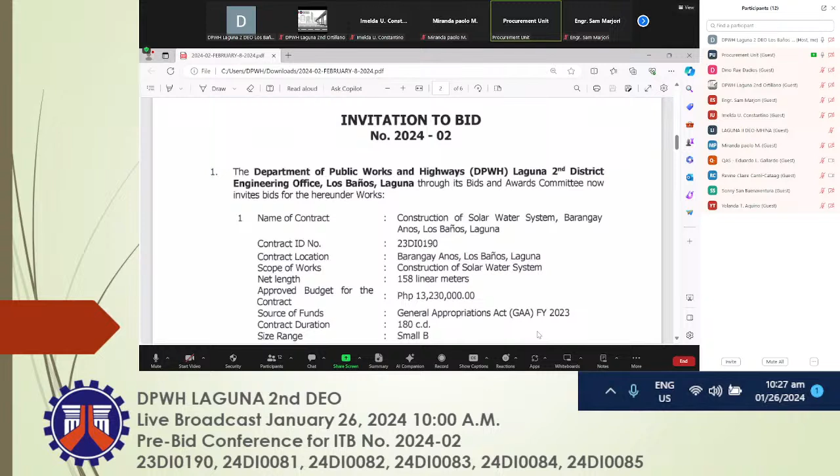First project: construction of solar water system, Barangay Anos, Los Baños, Laguna, with approved budget for the contract of 13,230,000 pesos. Second project, contract ID number 24DI0081: construction of road, Barangay Barandal, Calamba City, Laguna, with approved budget for the contract of 4,950,000 pesos.

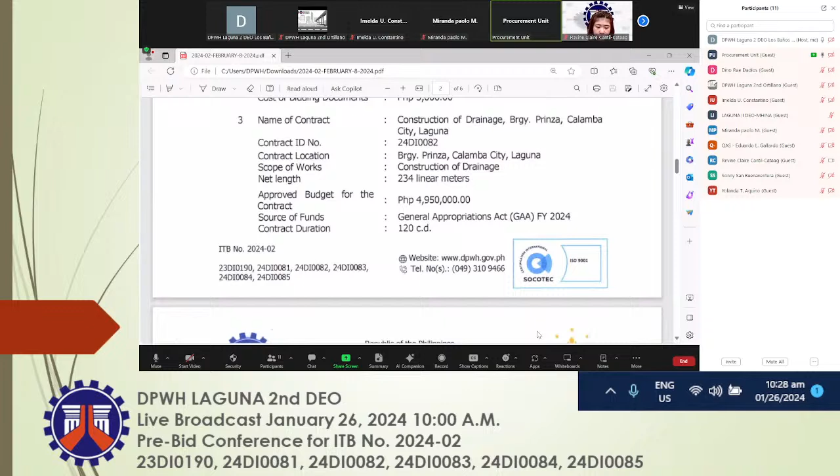Third project, contract ID number 24DI0082: construction in Barangay Prinza, Calamba City, Laguna, with approved budget for the contract of 4,950,000 pesos. Fourth project, contract ID number 24DI0083: rehabilitation of road and bridge, Barangay Dela Paz, Biñan, Laguna, with approved budget for the contract. Next project, contract ID number 24DI0084: construction of the revetment of Mayapa near Barandal-Mayapa Bridge, Barangay, with approved contract of 49...

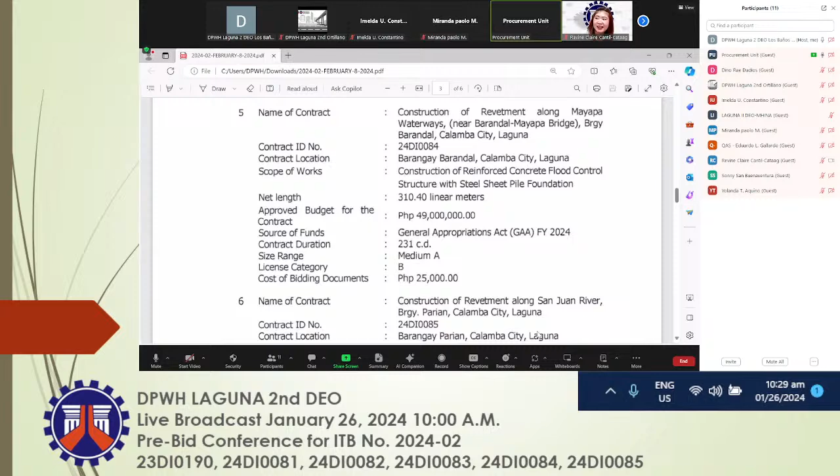And our last project is the procurement for the construction of revetment, with approved fund of 59,164,150 pesos.

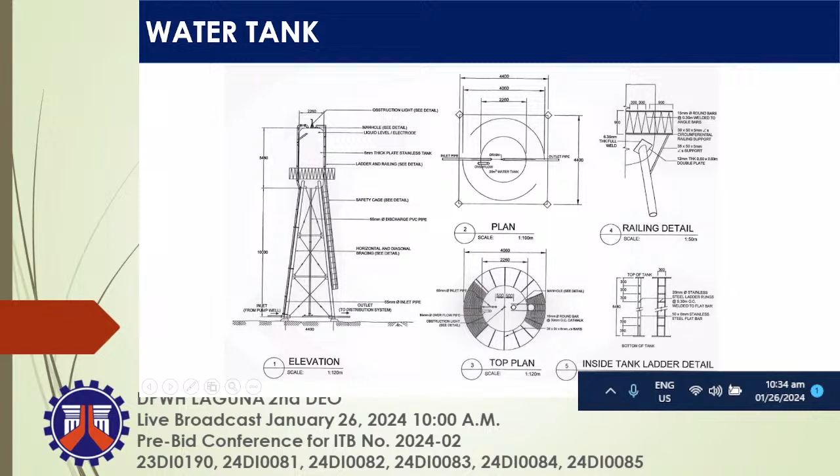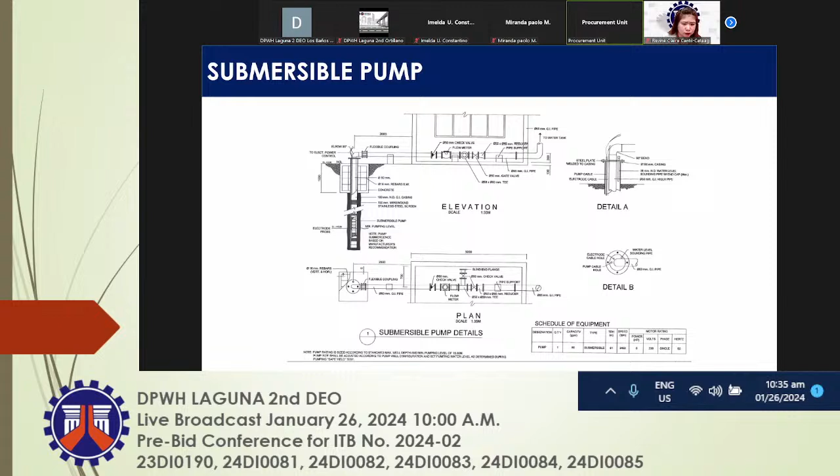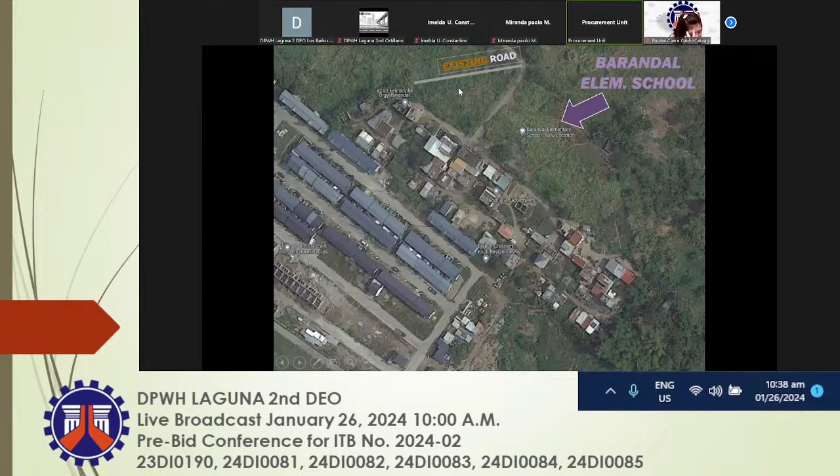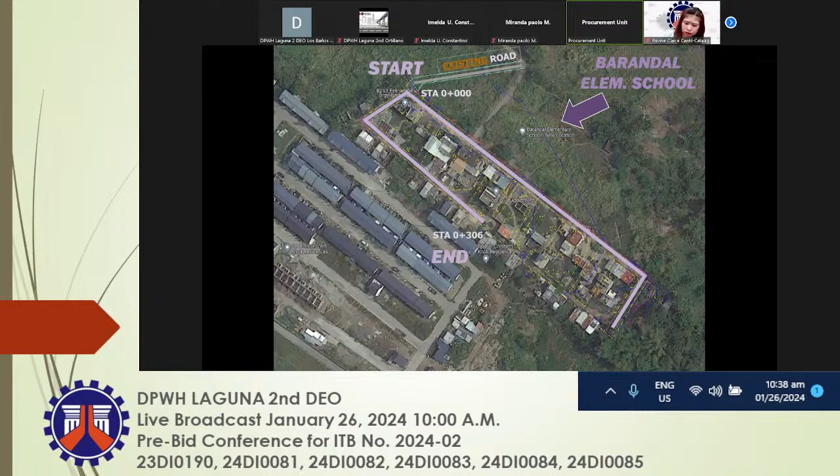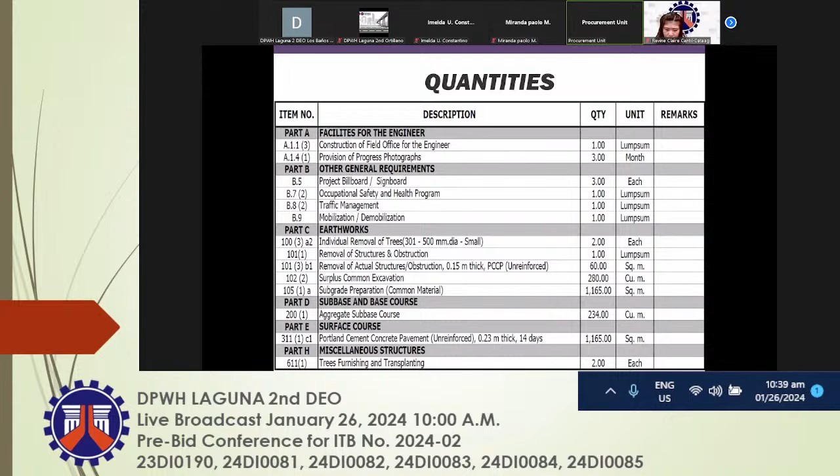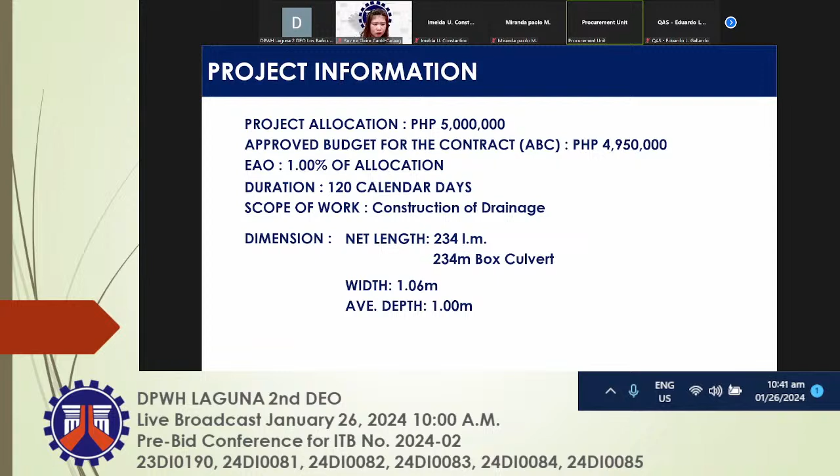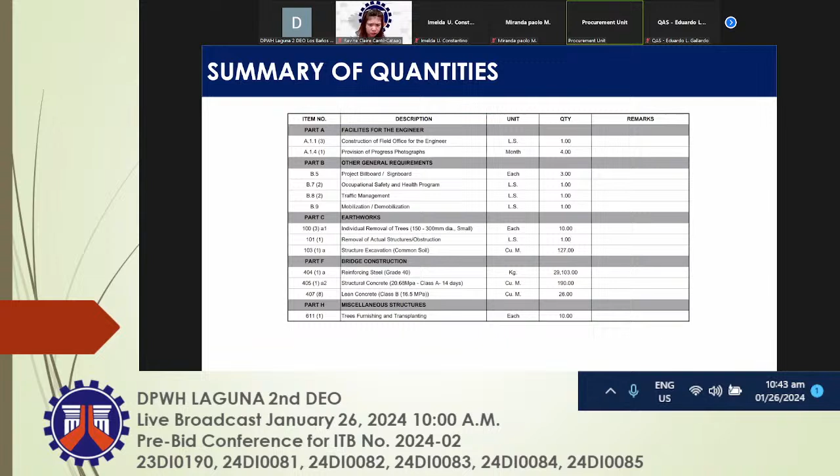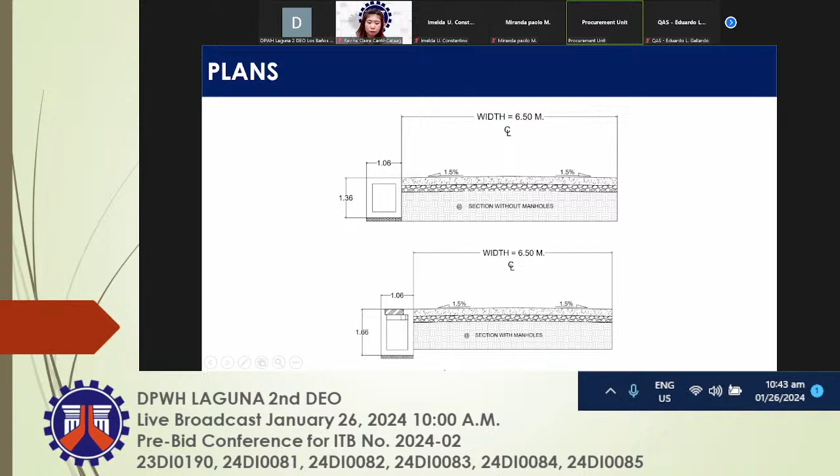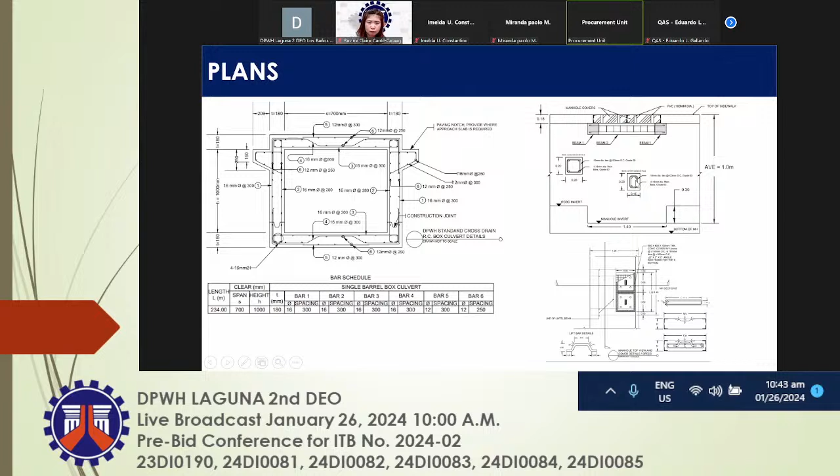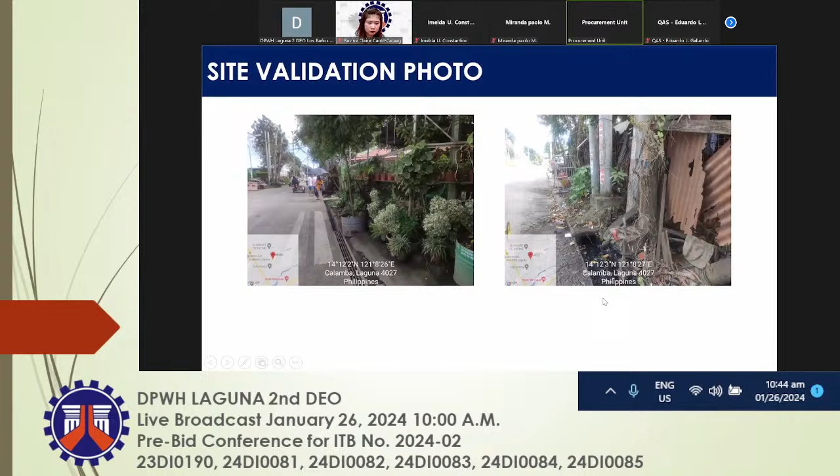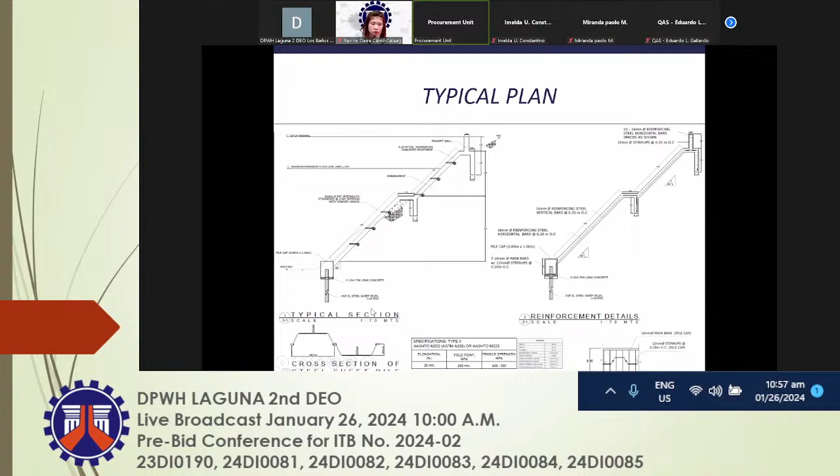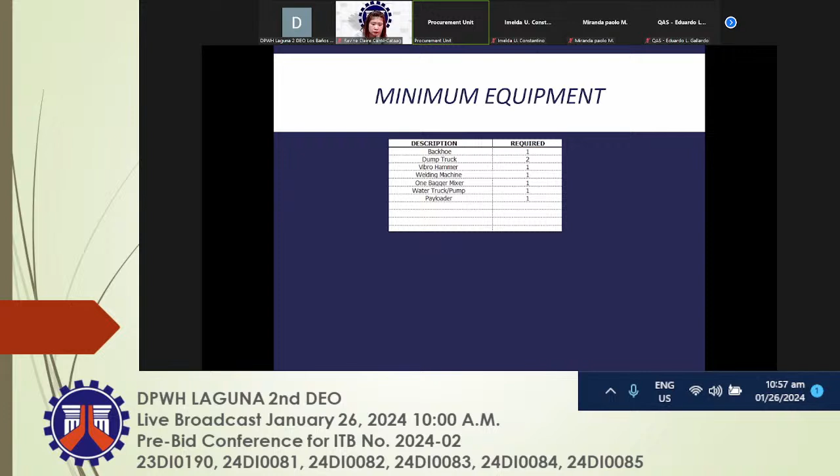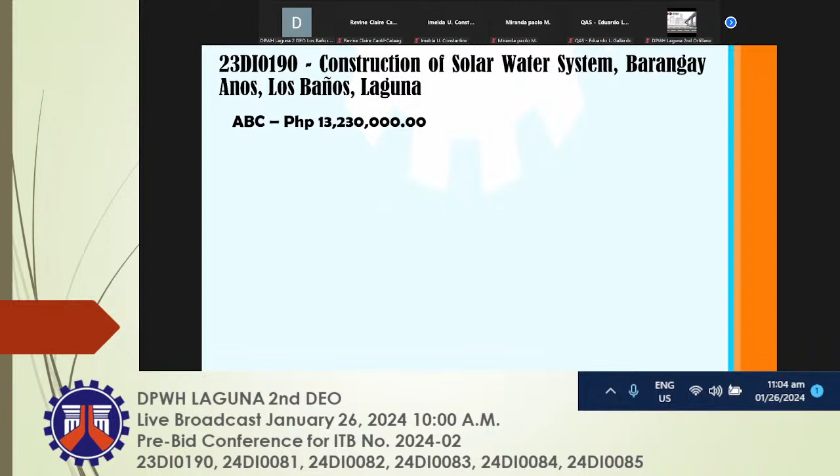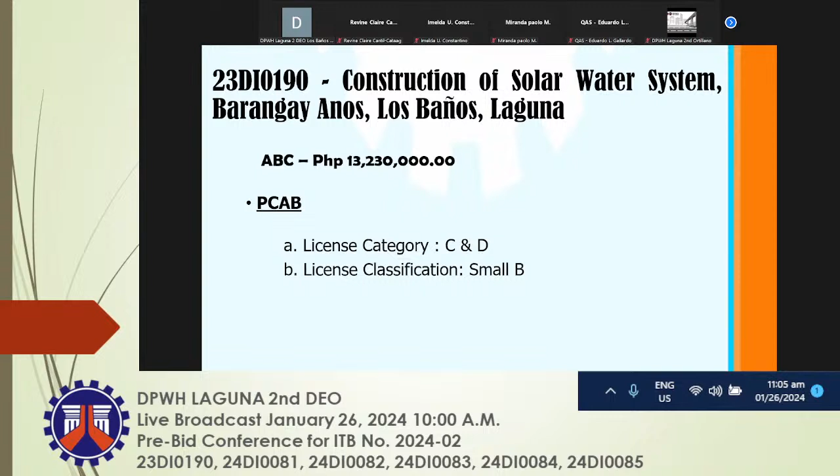23-0190, construction of solar water system, Barangay Anos, Los Baños, Laguna, with an ABC of 13,230,000. The major category of works is water supply, level 2 and 3. The following are the similar categories. For the PCAB license category, it should be category C and D, and classification small.

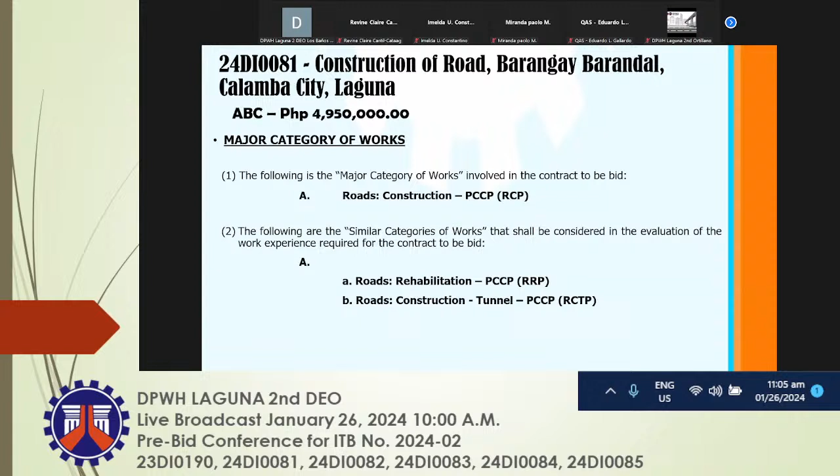Next project, 24-0081, construction of road, Barangay Barandal, Calamba City, Laguna, with an ABC of 4,950,000 pesos. The major category of works is road, and the following are the similar categories. For the PCAB license category, it should be category C and D, and classification small.

Next project, 24-0082, construction of drainage, Barangay Prinza, Calamba City, with an ABC of 4,950,000 pesos. The major category of work is flood control, and the following are the similar categories. For the PCAB license category, it should be category C and D, and classification of small.

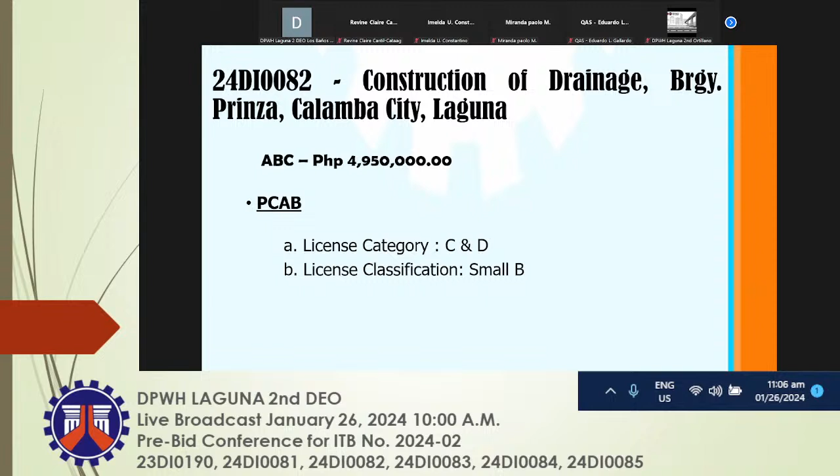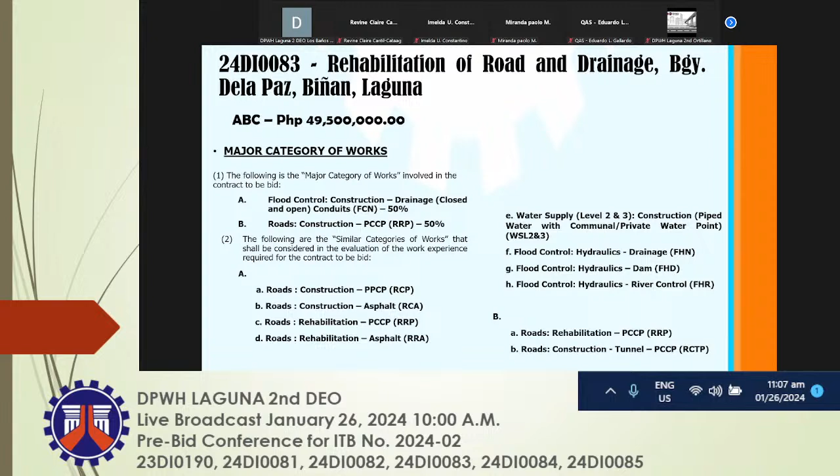Next project po, 24-0083, rehabilitation of road and drainage, Barangay Dela Paz, Biñan, with an ABC of 49,500,000 pesos. The major category of works are flood control and road, and the following are the similar categories. For the PCAB license category, it should be category B, and classification of medium.

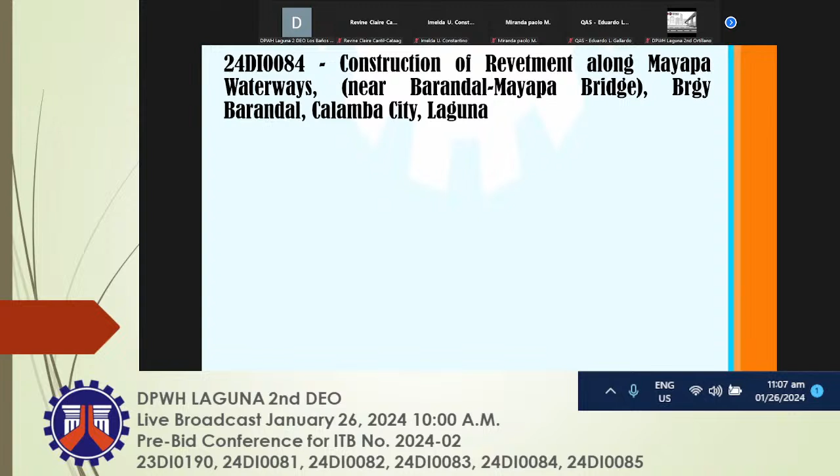Next project, 24DI0084, construction of Revetment along Mayapa Waterways near Barandal-Mayapa Bridge, Barangay Barandal, Calamba City, with an ABC of 49 million pesos. The major category of work is flood control, and the following are the similar categories. It should be category B, and classification of medium.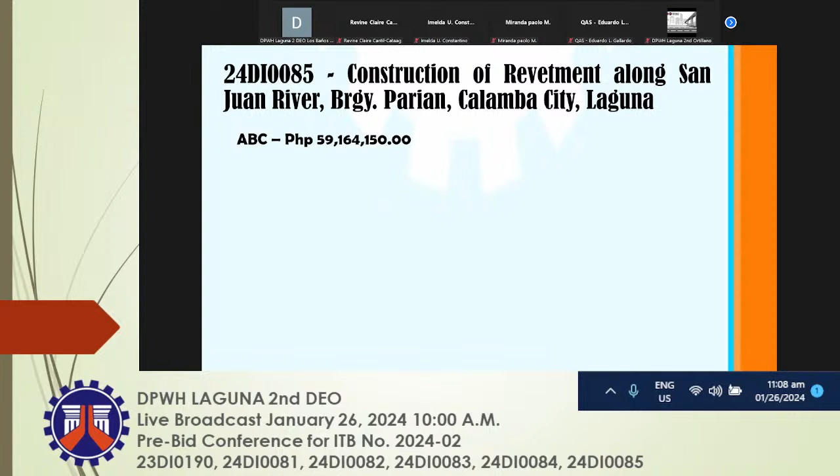For the last project, 24-0085, construction of Revetment along San Juan River, Barangay Parian, Calamba City, with an ABC of 59,164,150. The major category of work is flood control, and the following are the similar categories. For the PCAB license category, it should be category B, and classification of medium.

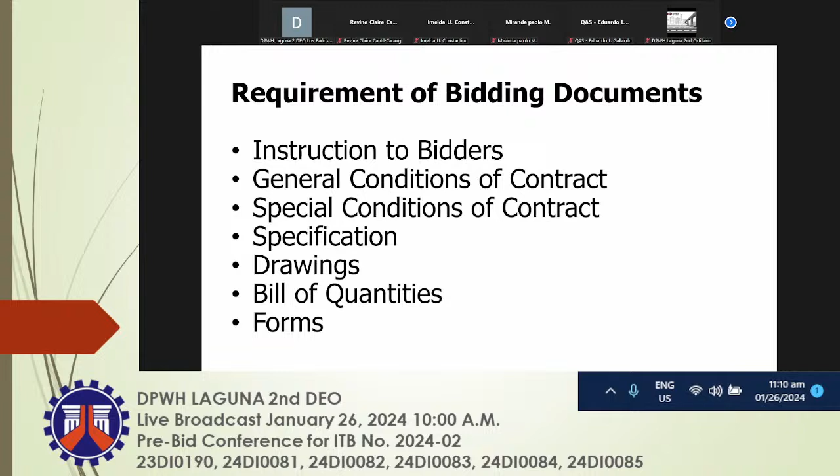Eligibility requirements for the technical component. For Class A documents, for legal documents: PhilGEPS registration certificate, valid PhilGEPS registration certificate, platinum membership in accordance with section 8.5. For technical documents: statement of prospective bidder, government and private contracts, including contracts awarded but not yet started if any, whether similar or not similar in nature and complexity to the contract to be bid. Statement of the bidder's single largest completed contract, similar to the contract to be bid, except under conditions provided under the rule.

Special PCAB license in case of joint ventures and registration for the type and cost of the contract to be bid. Original copy of bid security in the form of a bond. Submit also a certification issued by the Insurance Commission or original copy of notarized bid security declaration.

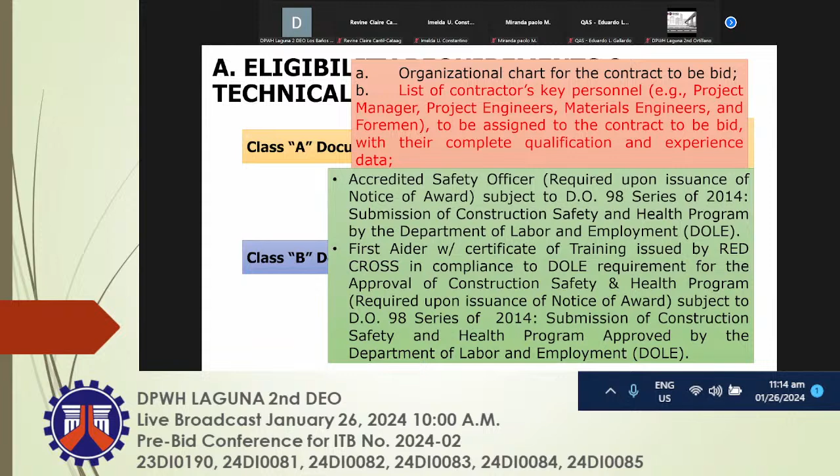Original duly signed omnibus sworn statement, and if applicable, original notarized secretary's certificate in case of a corporation, partnership, or cooperative, or original special power of attorney of all members of the joint venture, giving full power and authority to its officer to sign the OSS and do acts to represent the bidder.

The net financial contracting capacity (NFCC) of the bidder shall be used in the eligibility processing. Prospective bidder must have an NFCC at least equal to the ABC to be procured, as follows: NFCC equals the difference of current assets and current liabilities, multiplied by 15, and it will be subtracted by the value of portions of all outstanding works under the bidder's ongoing contracts, including awarded contracts to be started, which portions coincide with the contract to be bid. The fixed factor of 15 shall be used in the computation of NFCC regardless of the contract to be bid.

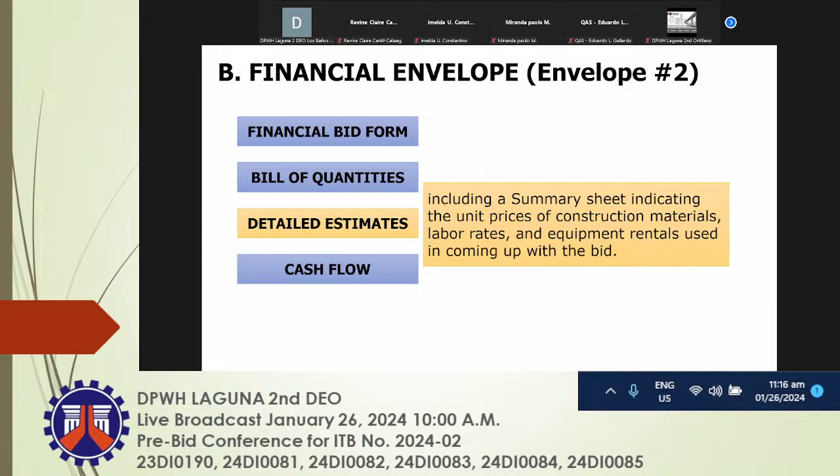For financial envelope, or envelope number 2: financial bid form must be in accordance with the form prescribed, bid prices in the bill of quantities, and detailed estimates including a summary sheet indicating the unit prices of construction materials, labor rates, and equipment rentals used in coming up with the bid.

Quarterly and monthly cash flow and payment statement, and instruction to bidders. Under ITB clause 20, from bid data sheet, the bidder shall submit 1 original and 2 copies of the first and second components of its bid, written in indelible ink and signed by the bidder or its duly authorized representative.

All envelopes shall: A, contain the name of the contract to be bid in capital letters. B, bear the name and address of the bidder in capital letters. C, be addressed to the procuring entity's BAC. D, bear [details], and E, bear a warning: do not open before the date and time for the opening.

The bidder shall enclose the original eligibility and technical documents in one sealed envelope, and the original of their financial component in another sealed envelope marked original financial component, sealing them all in an outer envelope marked original bid. Each copy of the first and second envelope shall be similarly sealed, duly marking the inner envelopes as copy number 1 or 2 technical component and copy number 1 or 2 financial component, and the outer envelope as copy number 1 or 2. Note: these envelopes containing the original and copies shall then be enclosed in one single envelope.

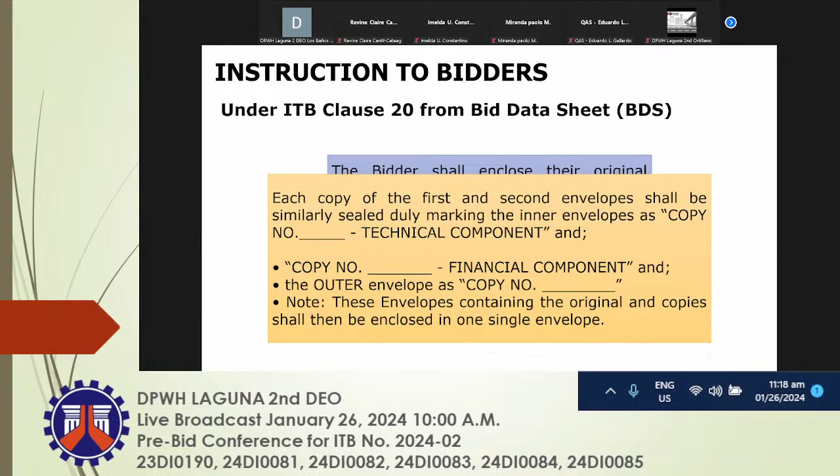Please refer to D.O. 11 series of 2017 for the inclusion of the minimum materials testing equipment in the technical component of the bid. For the minimum materials testing equipment, and D.O. 127 series of 2018, strict application of RA 9184 in the conduct of post-qualification of bidders with delayed ongoing contracts with the DPWH.

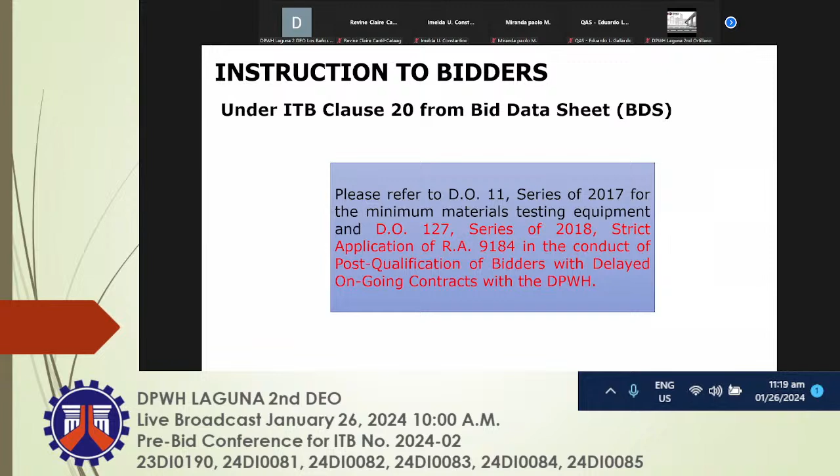For our next topic, about the electronic submission.

Electronic submission and receipt of bids. Legal references: Department Order Number 87, Series of 2020, on electronic submission and receipt of bids for the procurement of civil works contracts.

GPPB Resolution Number 09-2020, dated May 7, 2020, approving measures for the efficient conduct of procurement activities during a state of calamity or implementation of community quarantine or similar restrictions, authorizing the submission and receipt of bids through electronic means or email.

2016 Revised IRR of RA 9184. Electronic submission and receipt of bids procedures. Number 1.

Post the invitation to bid and bidding documents. Responsible person: BAC Secretariat. Must be posted in the DPWH and PhilGEPS websites and at any conspicuous place for 7 calendar days per Section 21 of the IRR of RA 9184.

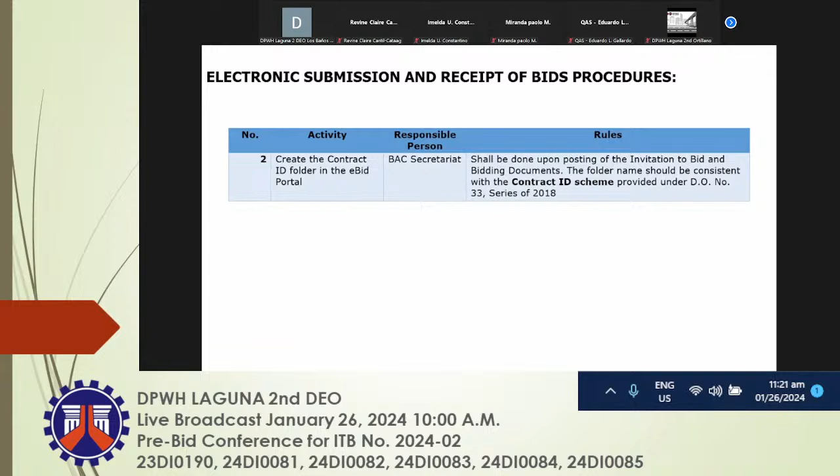Number 3. Purchase the bidding documents. Responsible person: contractor. Section 17.4 and Appendix 8, Guidelines on the Sale of Bidding Documents of the IRR of RA 9184.

Number 4. Send the proof of purchase of bidding documents. Responsible person: contractor.

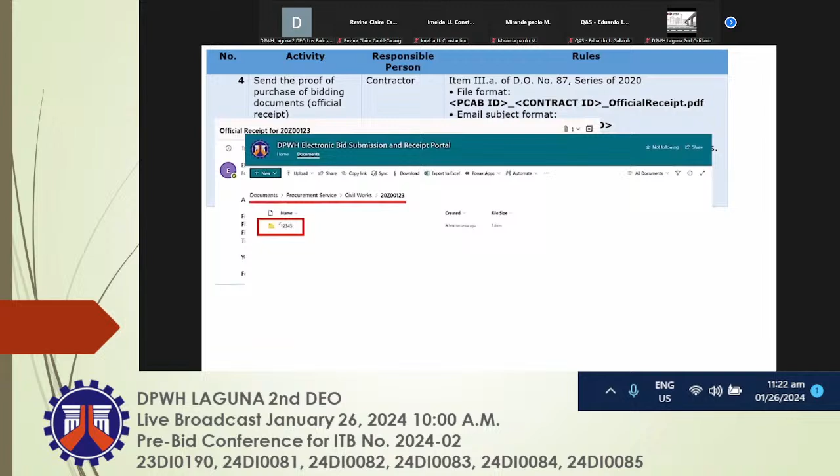Number 5. Send the electronic bid. Responsible person: contractor. File format: PCAB ID underscore contract ID underscore bid dot zip.

Email subject format: bid submission for contract ID. Must be in a password protected archive format, and shall contain 2 password protected archive files: the technical and financial proposal.

Number 6. Send the electronic bid due to attachment file size limitation of the email service provider used. Responsible person: contractor.

Item 3.I of DO Number 87, Series of 2020. Email subject format: bid submission 1-24 contract ID, bid submission 2-24 contract ID.

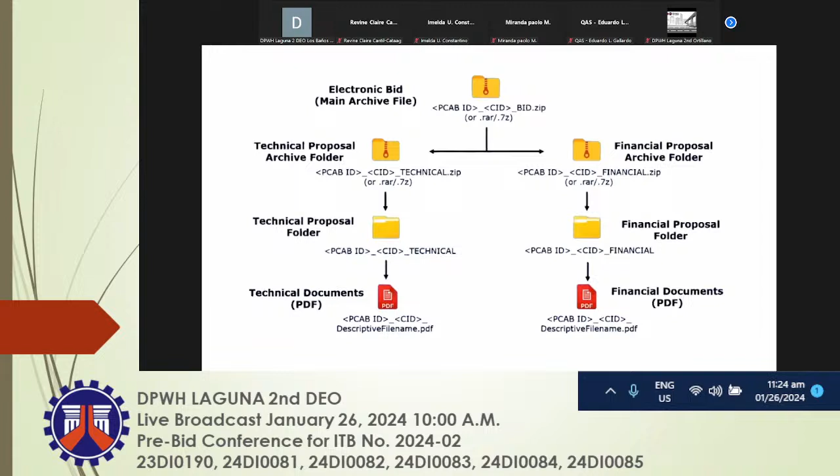Electronic bid main archive file, containing the technical proposal archive folder and the financial proposal archive folder.

Number 7. Send the bid modification, if any. Responsible person: contractor.

File format: PCAB ID underscore contract ID underscore bid underscore modification underscore X dot zip. Email subject format: bid modification X for contract ID, where X represents the number of bid modification submitted. Must be in a password protected archive format.

Number 8. Send a letter of non-participation. Responsible person: contractor. File format: PCAB ID underscore contract ID underscore non-participation dot pdf.

Email subject format: non-participation for contract ID. Must be in PDF.

Number 9. Send a letter of bid withdrawal, if any. Responsible person: contractor. File format: PCAB ID underscore contract ID underscore bid withdrawal dot pdf.

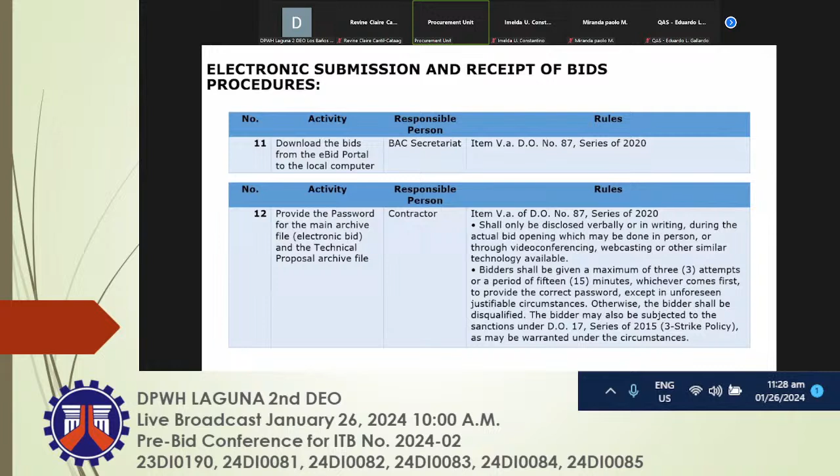Number 13. Open the main archive and the technical proposal archive file. Responsible person: BAC Secretariat. Item V.A of DO Number 87, Series of 2020, and Section 30.1 of the IRR of RA 9184.

Number 14. Provide the password for the financial proposal archive file. Responsible person: BAC Secretariat. Shall only be disclosed verbally or in writing during the actual bid opening, which may be done in person or through video conferencing, webcasting, or other similar technology available.

Bidders shall be given a maximum of 3 attempts or a period of 15 minutes, whichever comes first, to provide the correct password, except in unforeseen justifiable circumstances. Otherwise, the bidder shall be disqualified.

The bidder may also be subjected to the sanctions under DO 17, Series of 2015, three-strike policy, as may be warranted under the circumstances.

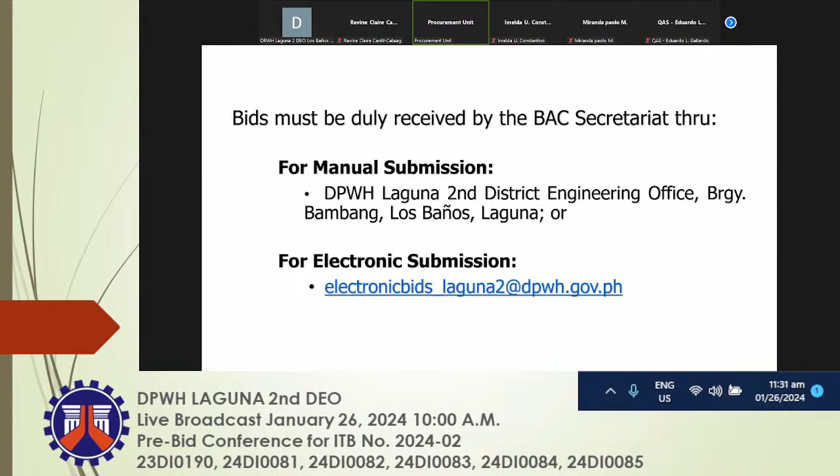Bids must be duly received by the Bids Secretariat through manual submission, as mentioned a while ago, here in our office, and for electronic submission, you can send it through bids_laguna2@dpwh.gov. Please be informed that the above mentioned required bidding documents are posted and available at the DPWH website and PhilGEPS for reference and guidance.

Once again, for the last time, we are encouraging especially our prospective bidders to not hesitate to ask questions or any clarifications, queries regarding the topic discussed from the running presentation, major category of works, technical category, and also with regards to technical and financial component.

So upon checking of our social media platforms, so far there are no comments or any questions or clarifications.